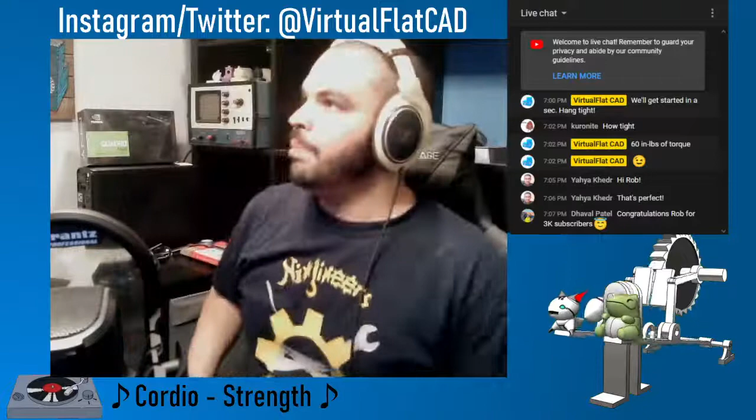Let me make the light not so intense. I just gotta adjust a couple things here. But yeah, still not sure what I'm gonna model for today.

I was thinking of Yaya's suggestion from last stream, doing like a gear cube. I think that could be pretty cool, or another one of the 507 Mechanical Movements. It'll bring me ever closer to completing that series. I want to complete it.

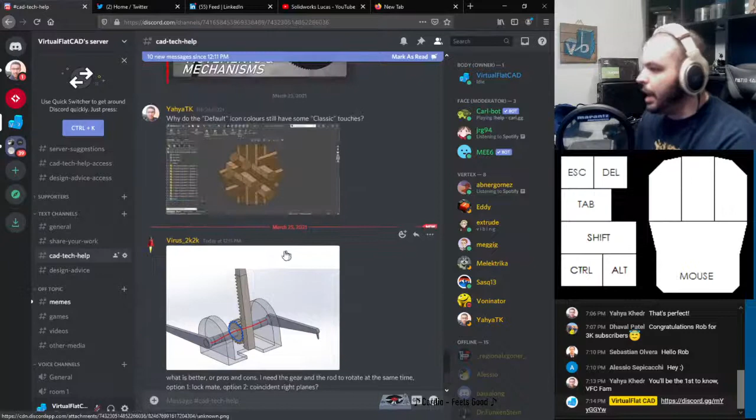So Virus is saying, what is better, pros and cons? I need the gear and rod to rotate at the same time. Option 1, lock mate. Option 2, coincident right planes. Let me take a look here. I see he wants this spur gear to rotate, basically fixedly linked to the rod that goes through them.

He asked a great question: should I use lockmate or coincident right planes? So Yaya's saying, I guess there is no difference. Well, that's almost true, and I'll elaborate, but I'll always go for the coincident mate. That's the same choice that I would make. Although I do have another option that I think is just as acceptable.

Why? For the same reason I never use the fixed sketch relationship. Yeah, it's true that a lot of lazy designers tend to just lean on fix, like, oh, it's just where I want it, let's just fix it in place and leave it like that. But I wouldn't go as far to say never, ever use it. It's there for a reason, but you got the right idea.

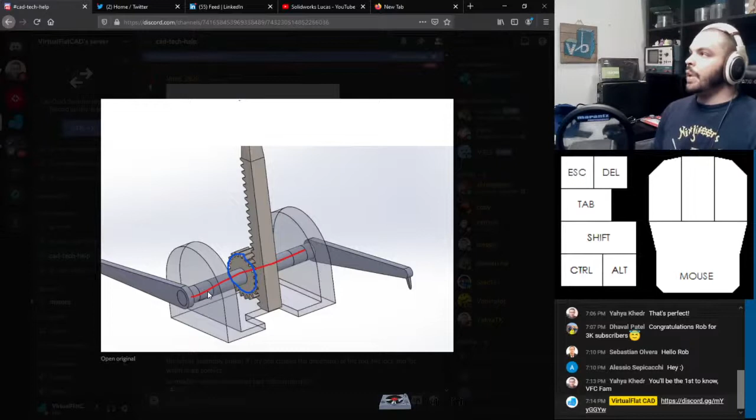So my opinion, coincident mate is better. Why is that? Lockmate just says one component is fixedly linked to the other with no other semblance of moving it together. So as an example, if for some reason it was modeled poorly or strangely - well, never with Virus's work, I know he's very good with his modeling - but let's just say this was some random model you found on GrabCAD by Joe Schmo, who knows.

So why I wouldn't use lockmate is that if maybe, for example, the gear is not exactly on the center of that shaft, if you put lockmate, it will lock those two together. That's true, but it will produce a lopsided rotation.

Lock doesn't have the intelligence to say, oh, this is supposed to rotate concentrically just to fix them together. But presumably there's already a lockmate, there's already a concentric mate there beforehand. So just having the coincident, if it's not in place, it'll move it in place, and you'll get that rotation.

Another thing you can do with this is if these are two separate components, you can actually click both of them and put them in a sub-assembly. You right-click both components, and there's a line item for form sub-assembly. Let me see if I can demonstrate here.

If I get just like an old... I think I did that here, so let me delete... oh, I killed the sub-assembly, so don't mind me. So yeah, here's actually kind of the same thing where I have this and this that need to rotate together.

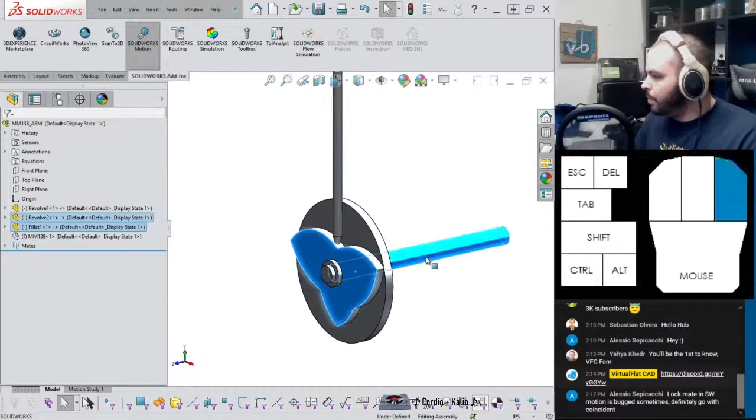So could you use the lockmate? Sure. So let's see. Well, there it is. But I want to actually make some identifying feature because I can barely tell that it's rotating.

So let me just do something. And I think that's gonna goof it up. Let's see how it does. I might have to fix that sketch. Yeah, I knew it, now we gotta fix that. We don't want... whoops, I hit F1 by accident.

My bad. Yeah, we want the midpoint to be snapped because I need to overbuild it. There we go. Identifying feature. So we have this and then this that need to rotate together.

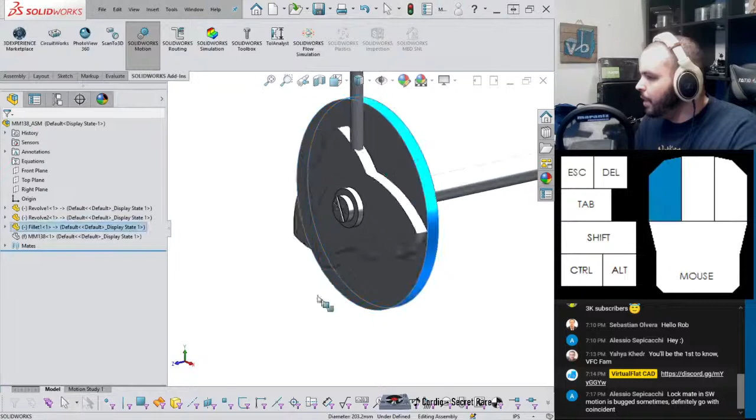So let's check out lockmate. Lock two components together. It certainly produces it, but you notice that beforehand. Whoops, there we go, until the lock is gone. If it was something like this and you didn't notice, and then you bring those two together.

Wonder why I'm not getting lockmate now. Perhaps I'll just find it here. Lock. So if you do lock just like that, you get something like this. The lock doesn't care, it just says put them, make them move as one.

So I like using the actual analytical mates. It can be a little bit kludgy sometimes. Alessio chiming in: lockmate in SOLIDWORKS is bugged sometimes, definitely go with coincident. Yeah, I totally agree with that.

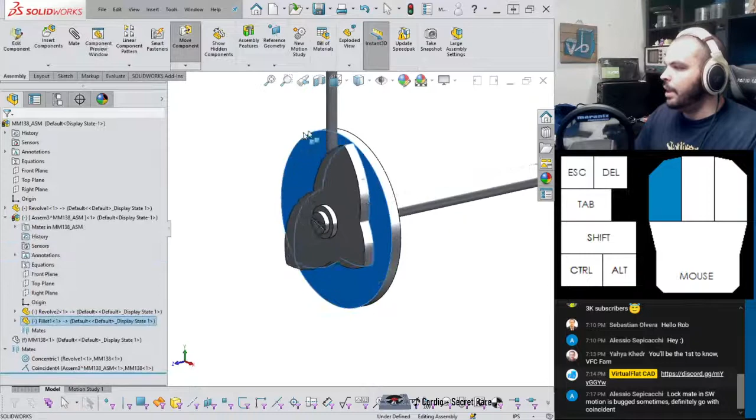But a third option is to do what I did here, although I think I should have just made it normally. You select the two components in question, right click, and say form new subassembly. What that does is make them move together. You can open up the subassembly on its own and then put more mates here if it's not quite right. But depending on what you want, you might not want a subassembly.

I hope that clears things up, and in this specific case, you can try concentric plus lock rotation instead of lock. That's another thing you can do.

Although you have to be careful. Let me see, so I can dissolve the subassembly to put them back. But yeah, for example, I can say make concentric like that. And with this concentric, I'm wondering what it'll do here. You can actually right click and say lock rotation. Oh, so I guess that works.

As long as... so what wouldn't have worked, so, you know, I model this in the way that I usually do, where I have a circle in the multi-body part that this came from. So this is yesterday's CAD model today, by the way. So let me remove this concentric. Let's do an experiment. So if I grab, yeah, so it looks like I have that arc 2 at sketch 9, so that's correct.

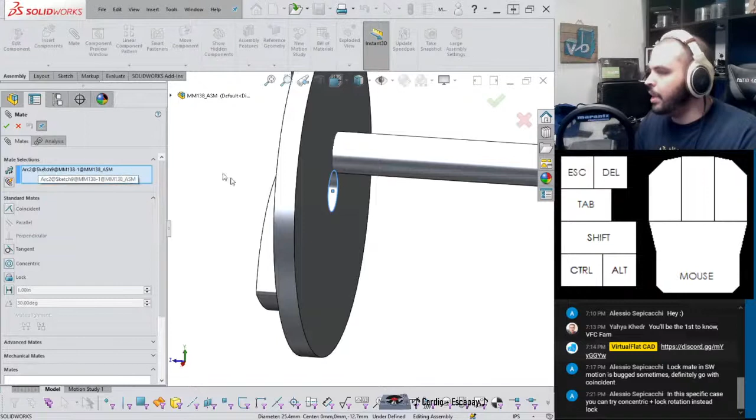With this, you can say concentric, and then within that concentric, say lock rotation. So now this can spin, but this is stuck in place, because the thing you're going coincident to is basically, well look, it's got a little F in parentheses. It's a fixed part, not meant to rotate.

So you can use lock rotation too, just be careful with what you're mating with. What you select matters. You want, for it to work, you need to select a cylindrical surface of the part that's moving. I'm sure you guys would have done that anyway, because you guys are pretty slick. But it's important to point this stuff out sometimes. It can be tricky, it can be very tricky.

All right, so what else we got? Let's get back into here.

Ooh, do I have it? Yeah, I actually got another window. But yeah, great question, Virus. He asked another question.

I've answered this one in the past, but I'll do it again because it's such a relevant question, especially if you want to produce animations like I do. So what is the best codec to export video? Awesome question, so we'll go over it.

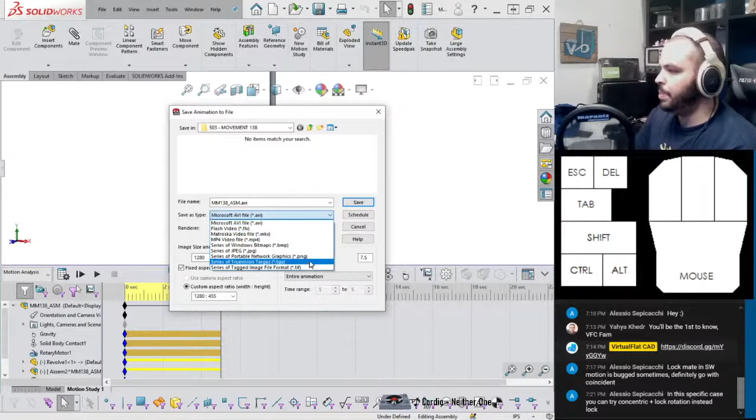So we have a handful of options, and this list got expanded in SOLIDWORKS 2019. If you're using the latest version, 2021, or like me, 2020, or even 2019 when the new options appeared, your best option by and large is MP4. From file size to just clarity of the video, it doesn't have artifacts. MP4 is just the best for that. But before 2019, MP4 wasn't available.

I believe you had, I think just, I gotta check what the new options are, or what the old options were, because I know AVI was one of them. I don't think Flash Video or Matroska were there, MP4 wasn't there, but I think series of images was there, so you can have bitmaps, JPEGs, and PNGs if you want. And correct me if I'm wrong.

So basically, you want some form of AVI. So if you've watched my streams in the past, I just hit MP4, and you just save it out, and that's it. It doesn't give you any more options.

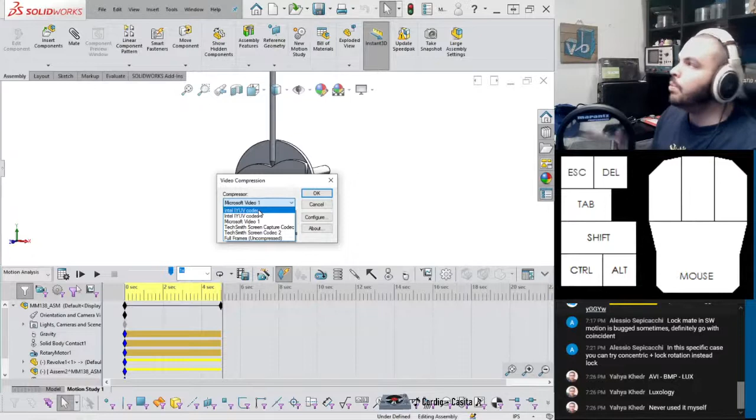I haven't really found a codec that doesn't make the video look like garbage. So let me see, if I do Microsoft Video and let's just hit OK. Let's see what happens. We got the ding, ding means it's done. And open up with media player.

Yeah, but here, let me, what I probably should do, sorry about that, should have made that square video. Let me see, can I zoom into this? The thing is, I don't want to put it into VLC because that's what's playing the music right now. Let me try it one more time, but instead I'll make it square format.

So square, AVI, we want to replace, and we're going to test with a Microsoft Video codec. Didn't give me that message before. Give me that corrupt AVI.

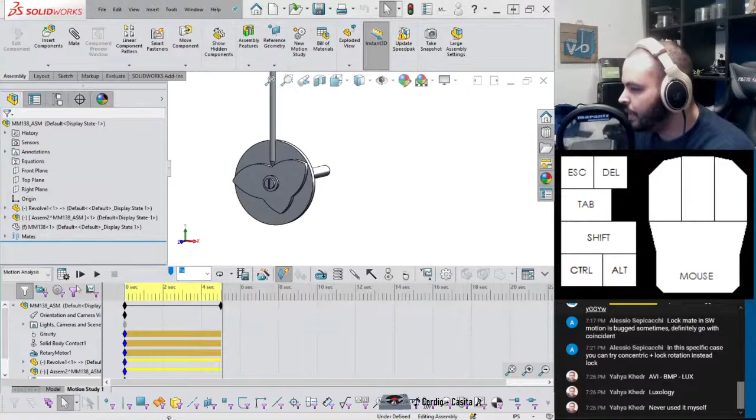Yeah, that's a bit better, but I gotta drag it onto the main screen. But yeah, now you can see a little bit better. There are these nasty purple artifacts on it, and it just looks terrible, to be frank.

So my recommendation is don't use a codec at all. Do this, AVI. We want to replace and just go full frames uncompressed. For quality, that's what I recommend.

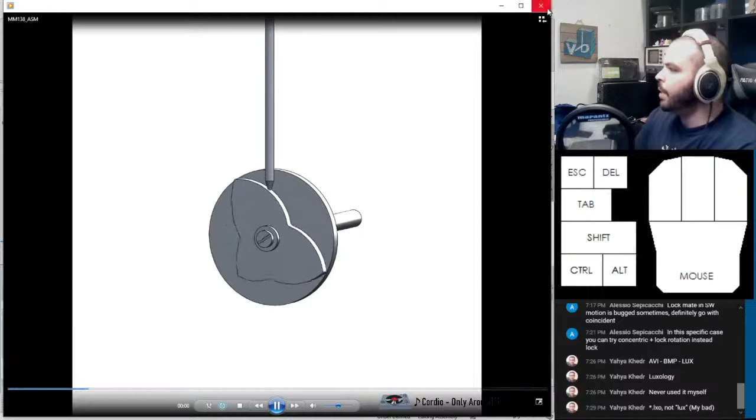So let's take a look at the difference here. See, none of those artifacts remain. But Virus already knew this.

Oh, okay, that sounds better. Yeah, that's why I was a bit confused. But it's like I haven't looked at those old versions of SOLIDWORKS. But as you can see, better results.

As Virus was saying already, he already pointed this out. I only have AVI, my file size ends up being in the gigabytes for 5 seconds. I don't know if that is the case, but this is already at 200 megabytes. Enormous file. So that's the downside to AVI uncompressed.

Yeah, I don't think there's really a way around it. There are online converters that you can take your AVI file and get an MP4 out of it, which would hopefully be smaller. The only other piece of advice I can offer, if you have editing software like Adobe Premiere Pro, you can actually import a series of images as frames. So then you would do it as a series of portable network graphics instead of AVI. Yeah, you hit the nail on the head.

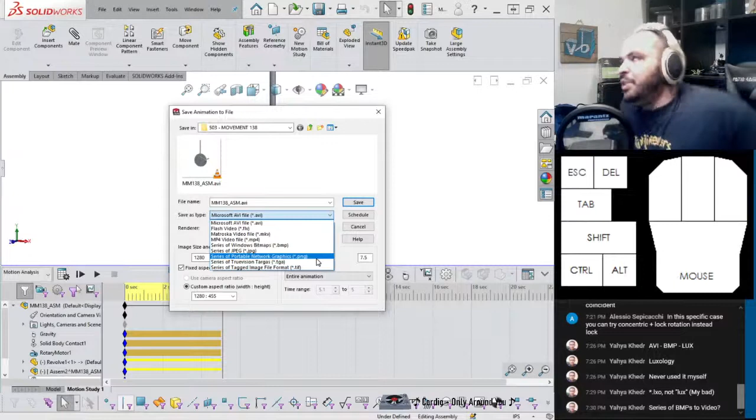I'm pretty sure you said it a little before I did, but I just saw your message. That's the next thing I'd recommend: series of images. If you have Adobe Premiere, there's actually an option to select a folder and it'll turn it into a video for you, but you need that editing software.

Not a lot of options here, but I'd say AVI uncompressed. Give it to an online converter, or download software to do it for you, and just delete the original file to save on space, or put together a series of images.

Yeah, YouTube chat lag again. No, it's not that, I don't think the lag's that bad. But that's my little bit of recommendations for that. Hopefully that helped.

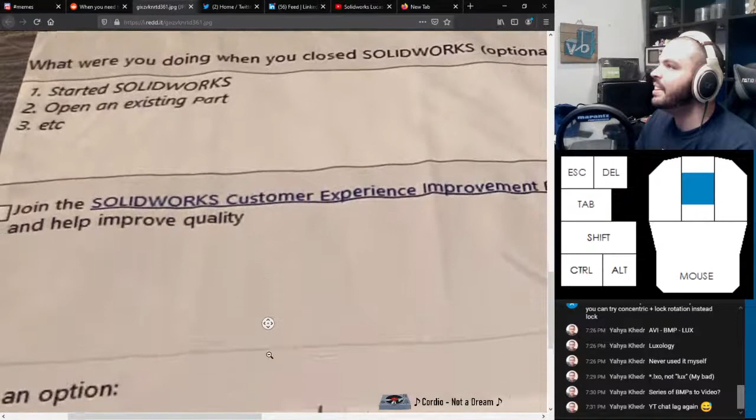You got a meme, from the SolidWorks subreddit. Let's see. Oh my god, where do I buy this? Bro, I need to buy this. That's literally amazing. I'm gonna see if I can have one of those made. That's too good. Yeah, how do I get one? Salvatore's being savage, says just try to type it in the open file search dialog box. You'll get one. That is too funny, dude.

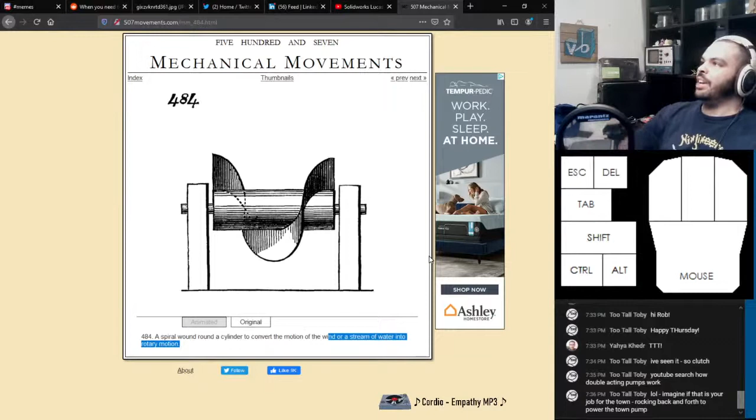Rocking, yeah. Too Tall Toby saying, imagine if that's your job for the town, rocking back and forth to power the town pump. I just imagine it, you're sitting in your home, you turn the tap, nothing comes out. It's like, that Jerry, is he sleeping again? You gotta get back on that pump, Jerry. Or by golly. Oh my god, that is too funny to imagine.

Common windmill, this is kind of cool. Screw propeller, the blades are sections of a screw thread, and the revolution in the water has the same effect of working a screw in a nut.

I like this where this is going, because there was a couple of people talking about the lack of surfacing, and this would be a good challenge to do for surfacing. Definitely haven't done that before.

This is cool, ordinary steering apparatus. Well, it's ordinary back then, this is like for a pirate ship. I've done 493 before.

What is this? Ferguson's mechanical paradox, designed to show a curious property of the epicyclic train. All right, this is too much for my brain after a long day of work, so we're gonna ignore that. I really like the propeller.

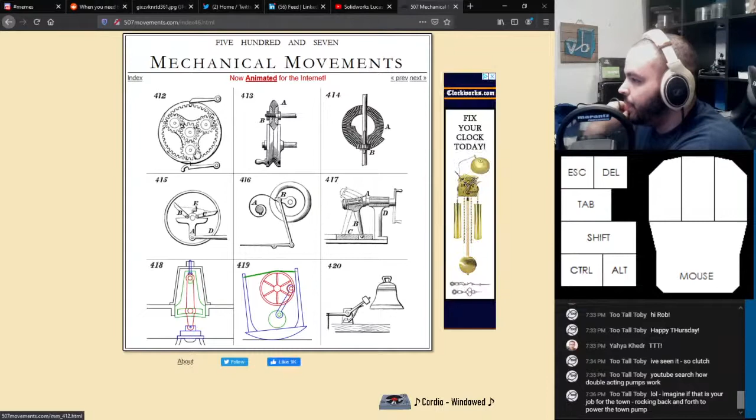What is this? This is kind of cool - will work in the base of the capstan. Look at these hands. It's so weird because we're looking orthographically at the device, but then there's these hands. I'm really liking that propeller.

Yeah, here's the one with the horse in it. I'm not even sure how I'm gonna do this one because it's basically a hamster wheel - a large hamster wheel with a horse in it, and he slapped a number on it, called it a mechanism. That's interesting. What is this? Bowery's joiner's clamp, plan and transverse section.

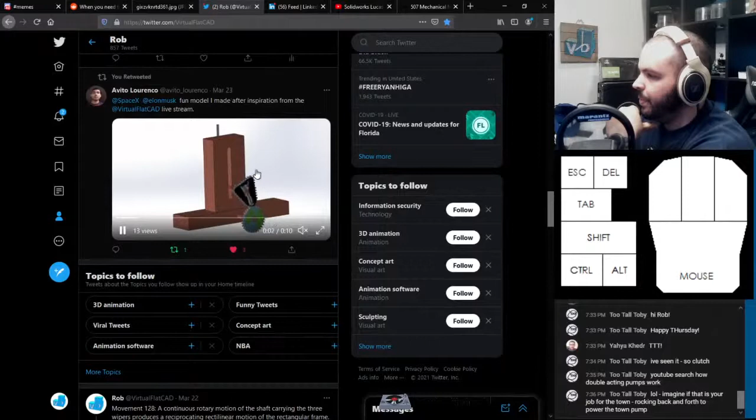That one's interesting. I think I'm gonna do that propeller just to break from the monotony. Oh, that's Avito's work, retweeted that. Yeah, everything I've done has been super prismatic. Well, maybe not that, but I've done a lot of prismatic stuff, so I think that'd be a nice change of pace.

Let's go look for it first. I lost it. I'll know it once I see the screw. So, 488. Yeah, let's do this one. So save. Put that in the 504.

Is Pickle Rick considered prismatic? Absolutely not. It's considered funny. Funniest thing I've ever seen.

Oh, I goofed up. 488. Throw this in here. Let's dismiss all of these, we don't need it anymore. Open - oops, no, we want to start a new part. Oops, we want to start a new part. My misclicks. I tell you, man.

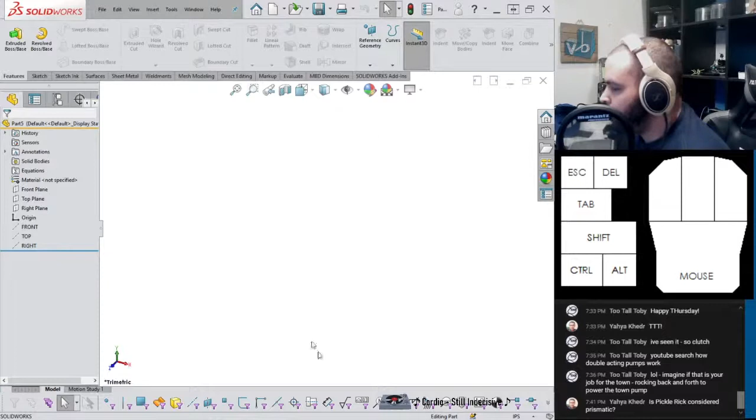Yeah, I think I'm just gonna paste a picture because I don't really have to trace anything, honestly - I'm just gonna do it by looking at it. So let's just copy the image and paste it as an ActiveX object. Forgot there's no paste in there. Paste. So where's our origin? So we can do the shaft last.

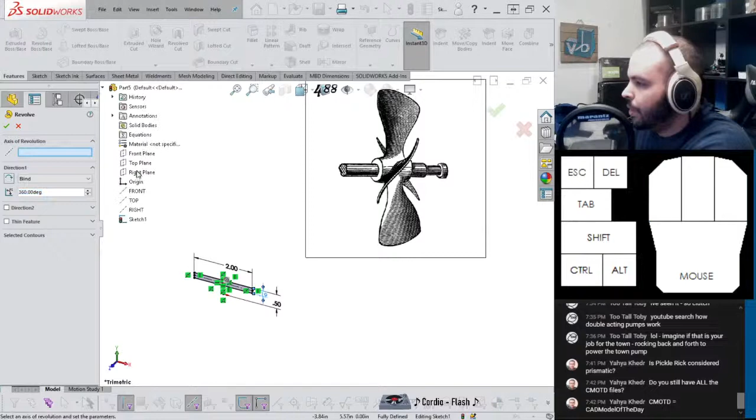I like how I'm gonna be doing this tube, kind of weird, but whatever. And let's get a revolve. Oop, I want, yeah, this. Okay, so how do I want to do this?

So definitely when you're working on something like this, you need to mentally break it down into its parts. So let me get the markup tool - SketchUp is a different program, maybe I'll use it sometime, but if you haven't tried markup, I think it appeared in SOLIDWORKS 2019 or 2020. It's a recent feature, but you can draw stuff. Stuff like, you see how this is kind of curvy? So I expect that to be a fillet.

So when I try and sketch this shape, I want to try and mentally remove where all the fillets would be, if that makes any sense. Because the more I try and do at any one time, the harder the feature becomes to create.

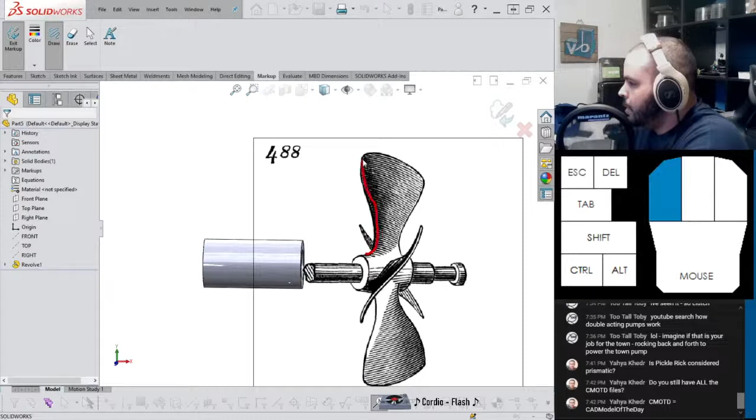So instead of drawing this thing exactly as shown, what I might try and do is draw, maybe starting from the center line of that axis, maybe going up something like this, and then coming up to a sharp point.

Maybe I want to go for something like that instead, where, let me change my color, this green line and this other green line are something that I can easily draw on a 2D plane, so I can control it very easily.

So for challenges like this, it's all about breaking it down into its bits and pieces. Not trying to do too much with one feature, because it starts becoming very difficult. And I might even make it even simpler than that, because there's a way to break this down even further.

Oh, I meant to try and erase that. So I'll show you. So instead of drawing this line and trying to get it to follow a curve...

Do I have green still? I do. I might draw these two curves, kind of the same length, like that, and then turn that into a surface, and then draw something like this, and then trim that surface down. So it's all about just breaking it down into those little bitty pieces.

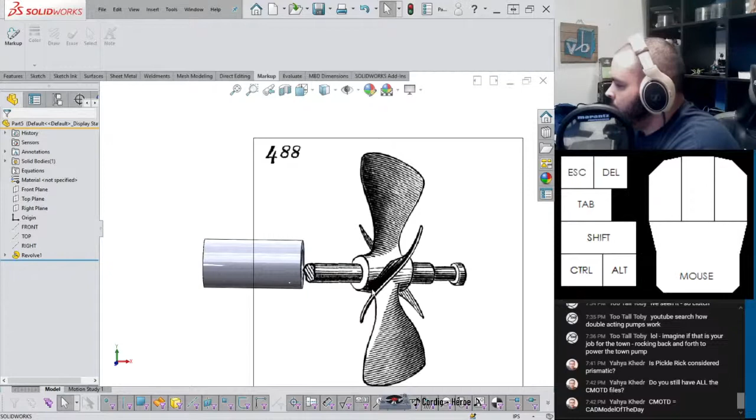So I think the first thing is I'm going to draw a sketch on the top plane. It's hard to kind of imagine the contours, but I imagine this. So you can see with the shading here, the darker shading implies a low spot. Light is coming from the left hand side, and the artist drew it shading here because this thing is curving up a little bit.

So there's going to be more extreme up here, but then it kind of dies down here. So it might even just be like a straight line. Let's try a straight line first. Simpler the better, right? So maybe we'll start with a midpoint line.

And we'll give it 1 5/8. So that's one. Let's get another plane like that, and maybe make that 4 inches long. It might end up being a little bit shorter in the end, but I think that'll be okay.

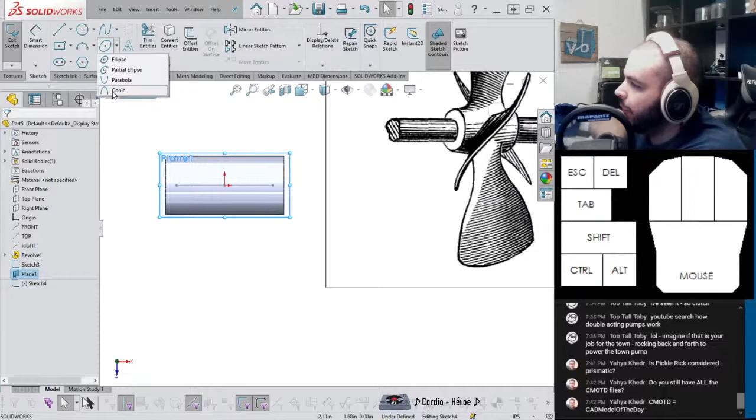And maybe what I want to do here, maybe let's try a funny sketch entity. No one ever uses a conic, right? So something like that.

And then we can start putting this into place, saying that those should be in the same place. I want to define the rho value. Maybe I want to make that a little further.

Oops, I meant to type. Oh, I totally dyslexic that. Is that even a word? So what should this be now?

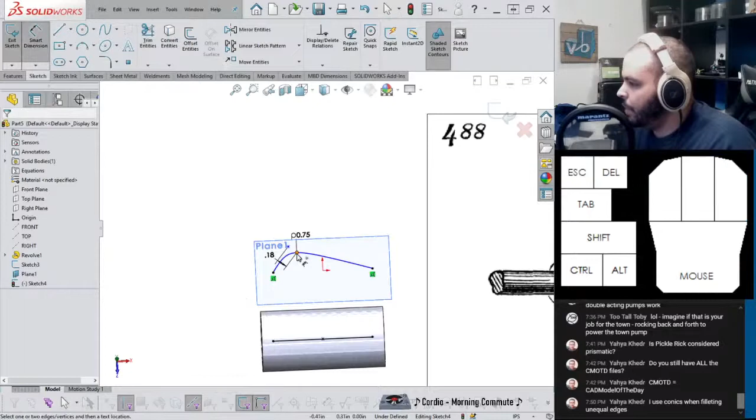Okay, so now use conics when filleting unequal edges. Yeah, it's an awesome way to use that. Although I think I assume you're talking about the conic, unequal distance. Yeah, that's a pretty common use for them.

But I assume you're talking about like the options that are in fillet. I don't really see a lot of examples where a conic is used as a sketch entity. And I could have just done that with a spline, but just to be cheeky and to try something new.

So now at this point, I'm gonna go grab a surface. You can see from the propeller, from the engraving here, that it's a thin sheet of constantly thick material, and that's like the perfect opportunity to use a surface, pretty much.

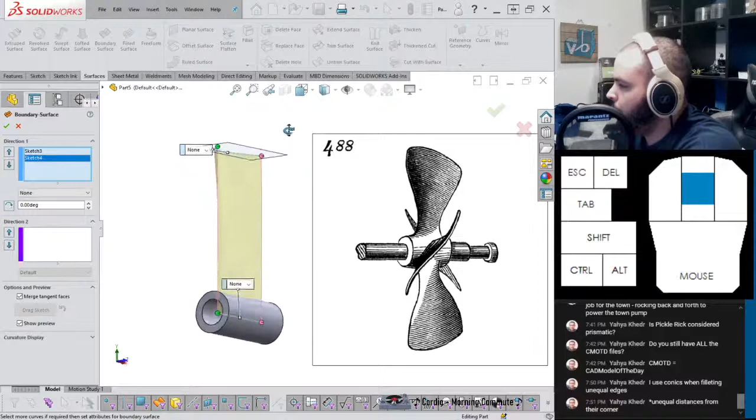So when you have a surface and want to get something of constant thickness, you create the surface using the trim tools and all the special functions, and then you thicken it at the very end. So let's see if I get a boundary surface from here to here, a nice four-sided surface.

You get something like this, and I might turn real view off, but you can kind of see where I'm going with that. And then what I can do, I'll make like the tapering here. Let me hide this away. I did that just by hitting tab.

Taper this away. I'll do that with, I like using a style spline. Actually, let me hide the original plane away. Something like this. So whenever you have a style spline and you start with one of the control vertices like in line with this, that means you just have it tapered down to be basically tangent with that, which is kind of what that looks here.

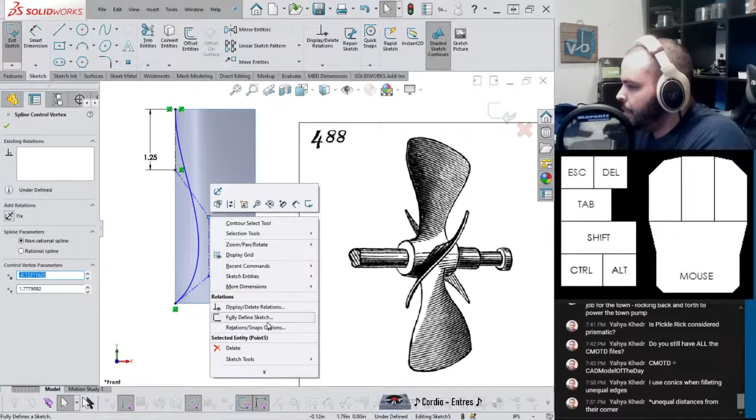Now I can kind of use this to fully define our shape. I might even remove—let's see what happens if I delete that. No, I kind of liked it how it was before.

1.25, something like that. So we kind of have it like this. And I might even say, put a center line like that. And I can say how wide this needs to be, or what's the width of this thing here. So I'll put that center line there. Maybe even make it infinite length so we can easily distinguish it, and say that this is tangent, and that should fully define it. So now I should be able to control this dimension, and this spline will move along.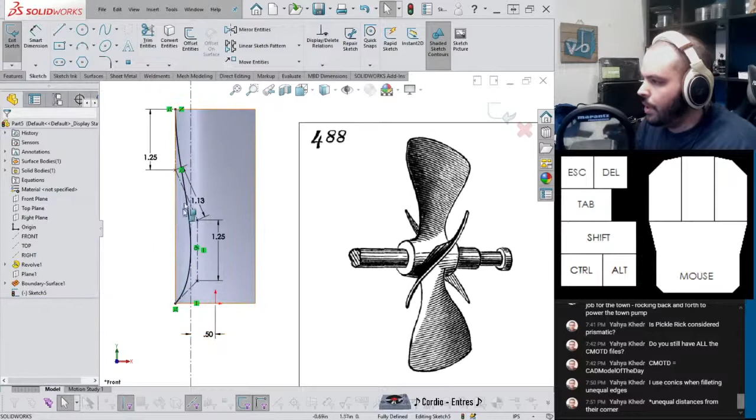And it's tempting to do the other side too, but I think this sketch has enough complication as it is. Don't be afraid to use more sketches if you need to. Simpler sketches are easier to diagnose when things go wrong. And you have infinitely many sketches you can take from. There's no shortage of them.

With a trim, get our standard trim, because if you have a sketch to trim with, you use standard. And there's kind of our first shape. So again, I'm just mentally removing the fillets. So there's that markup. At the end, I want to be left with a shape that looks like that, because I can take care of this with a fillet. I want to keep my surfaces four-sided if I can help it.

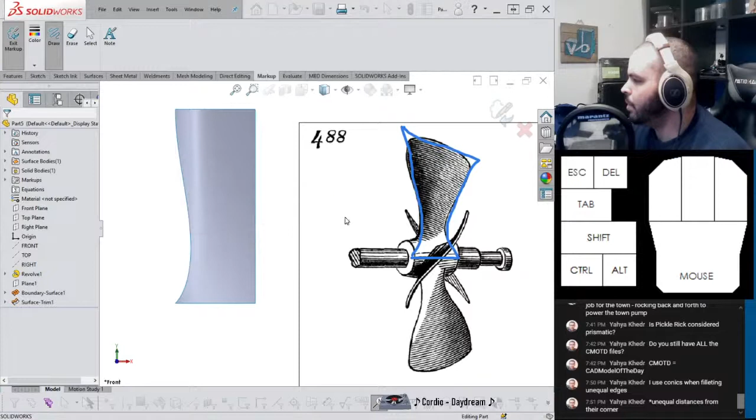So yeah, we can get rid of that, sure. Do another front plane. I might do that, you know, how it kind of comes down from the top, like that. And how far does that come down? Maybe that much?

Trim. Let's keep. And then now, just kind of do the same thing with a style spline. I think that'll be pretty cool. Something like this.

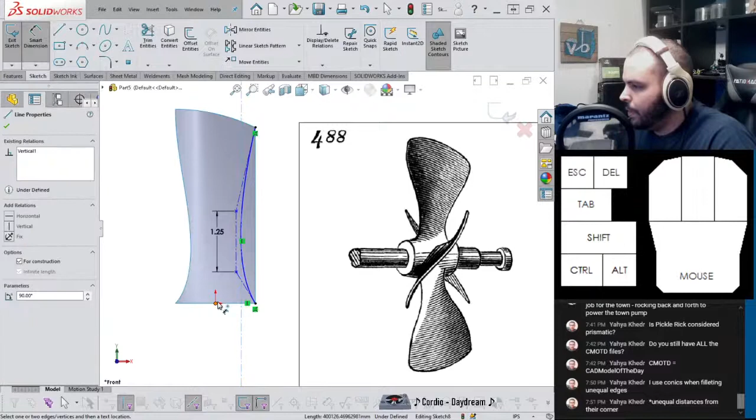1.25, trying to make it similar to the other one, and I'll even do the same thing where I get a center line. Let's see, that's infinite length. And give that a distance for this to stick to. So basically, where do you want this thing to rest? And, you know, maybe I'll try and make it somewhat equal with the other side, like that. So I just put a horizontal relationship between the two control polygons.

And what now? Trim. And that's kind of our blade. Kind of how it looks. Yeah, you need some work still, but you know, we're getting there.

So what I might do next is thicken. Just do thicken on both sides so we get this kind of equal. That might be too thick, honestly. Just kidding, there's no such thing as too thick. But for this exercise, I'll do something like that, right? This is overbuilt here, but that's something we can take care of pretty soon.

Because now I'll do a couple of fillets. And there's probably fillets that break these edges, but remember, you want to work from the largest fillets down to the smaller fillets. That's how you get the best chance for all the fillets you want to apply to actually complete.

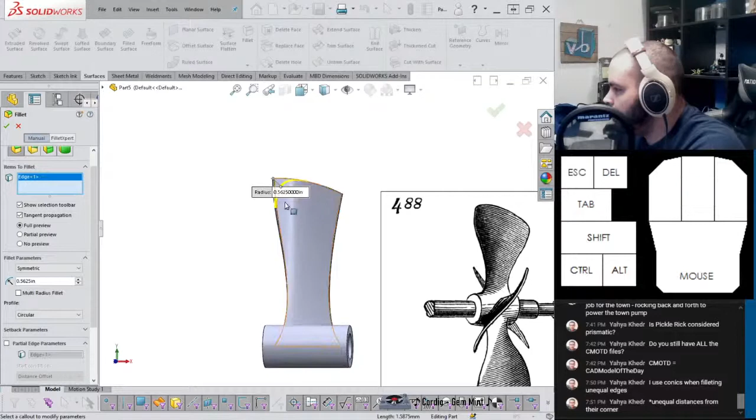And what I might say is, you know, that's looking all right. Maybe it's looking a little sharper. So maybe I'll take a page out of Yahya's book and say, let's go for a conic rho value. So the way this is might be a little too big. Let's see. There we go.

So with conic fillets, the way I like to think about it is you get a radius, which is kind of like this overall arc. But if you set it to 0.5, that's basically circular. And the closer you get to 0, the closer to a chamfer you get. But the closer to 1, and there's a limit to that in this example, the closer to 1 you get, the closer to the sharp corner. So it's like, on a scale of chamfer to sharp corner, where do you want your fillet?

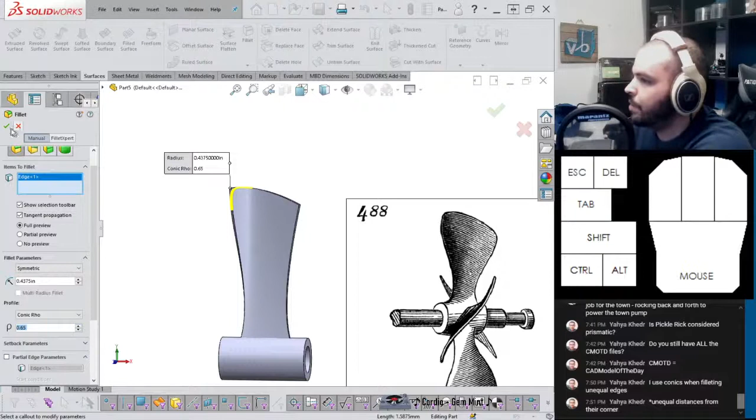So it's pretty cool. So maybe I want to actually turn that down a bit. So that is looking kind of like a sharp corner. So maybe I'll leave it at 0.6, maybe 0.65. That's looking pretty swell. Maybe I'm able to fillet this one with a similar look, and that looks pretty good.

I definitely like that. Alright, so now I need to pattern this eventually, doesn't have to be right now. Part of me wants to throw a curve in here. You see how this is straight? Doesn't look quite right. What I might do is roll this back to where I had this.

Yeah, I don't have this set up totally efficiently. Let me get flat tree view so I can reorganize this. So flat tree view, you hit Control T, and that puts all your features in like a literal order.

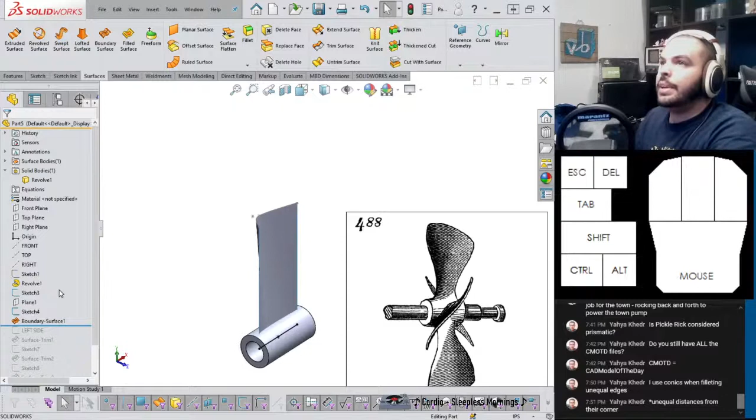Yeah, I'm gonna need a new plane. Not the biggest of deals, but I try to avoid having to create a bunch of extra planes if I don't need them. I can do something like that. Let's roll back, because I do need this new sketch I'm about to do created before that boundary.

And let's just try an arc. Let's see what that looks like. And then with this, I can just put a value. And that's the end.

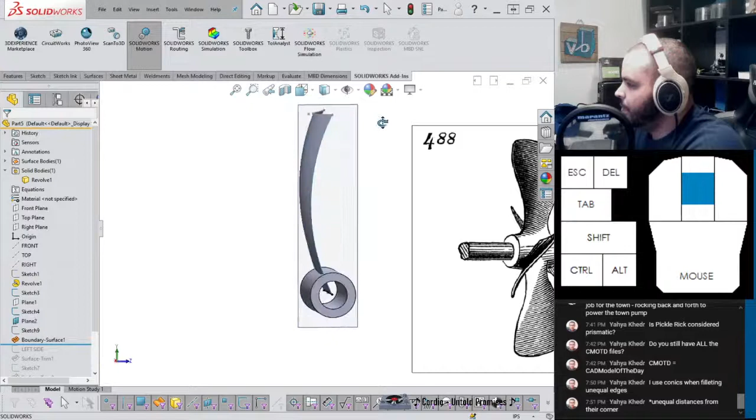So boundary surface, we need to edit. So for direction 2, let's put this. And that should put a little bit of character to our blade. Looks pretty cool, so let's see what happens now. So our trim fails. Let's see what's wrong, my dude.

That's interesting. If I clear, put this back. Okay, so I just had to reset it. I guess you're doing the same thing too. Sketch 7. Not really sure why this needs to be done, but whatever.

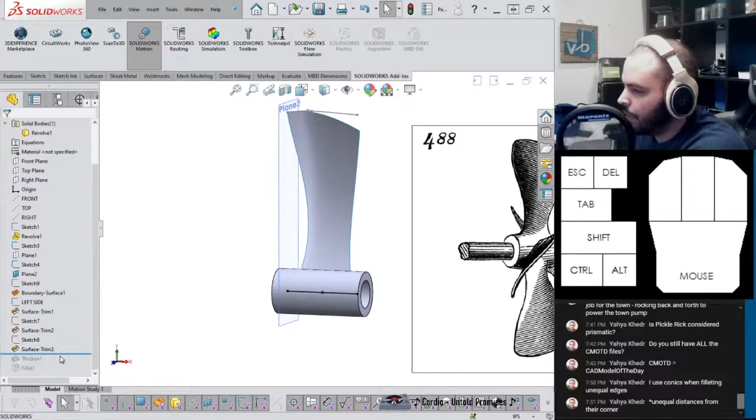I assume this has the same error. Well, the thing is, it's the same feature, so I would assume that the edges would be the same, albeit, you know, they're curvy now. Whatever, as long as we have a way forward. So that goes through and that goes through. That looks pretty cool.

Kind of want to adjust this. Put that over here and maybe put that like there. There we go. Everything just updates, and that's kind of how it looks like. Okay, now that looks like something.

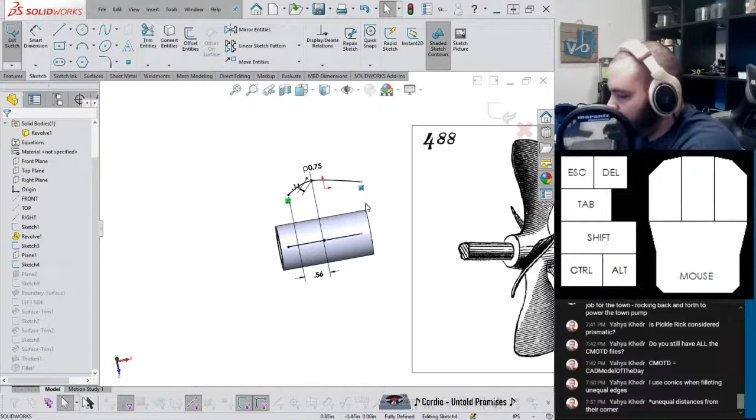Yeah, something I'm also considering as well. Man, it's just with these things, I can never just leave them alone, can I? What if instead of this, I do this? You know, give that a distance. Yeah, this is going to need a lot of adjustment. Sure, we're done with that before going on to this.

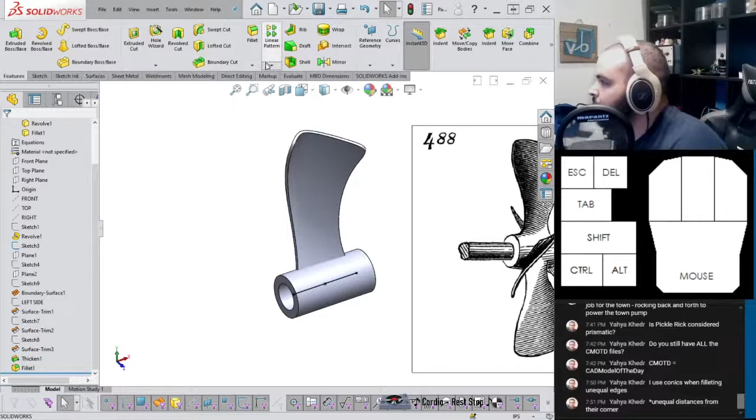That's pretty cool. So you can see when you build your sketches consistently, ideally you should be able to just do all these sort of testing stuff without blowing everything up, you know. But yeah, I think I'm just gonna leave this alone for the time being. Though no promises on that. You know how I am.

Part of me wants to merge this. Honestly, what I should do, let me go back to this revolve and just make this 90. Okay, so now that we're working basically in quarters, because I see there's 1, 2, 3, 4 blades here, I can merge this.

Yeah, well, I'm going to use a combine because I don't want to mess up the conical fillets. I'm going to use a combine, and to get rid of this extra stuff, let's grab a delete face command, and even just like pick that, and then say all surrounding, delete and patch. Like it was never even there, which is pretty cool. Let's give that a save.

I did all of that without saving, like the mad lad that I am. I already forget what number. I'm gonna call it propeller.

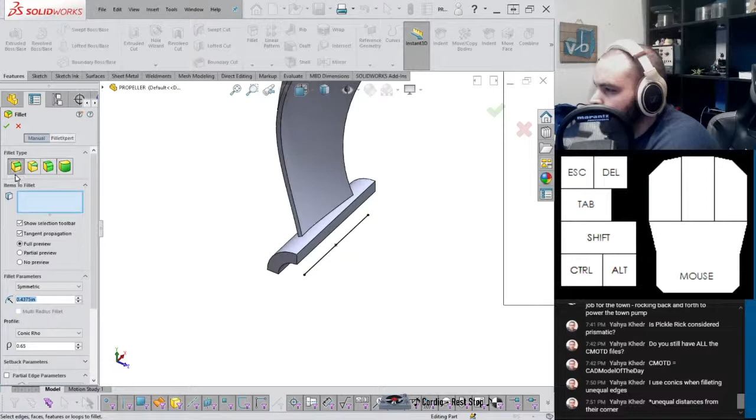Yeah, I'm gonna try and work on fillets and see what happens. So let me see if I can hit that right click and say select loop. It's gonna have to be a lot smaller. But I guess it appears to be too small, even with round corners.

Oh, but I'm still set to conic rho. Okay, that didn't do anything. That does not help me, so I may have to fillet these first. And actually, I can even specify a full round fillet. And it fails. Interesting.

So that goes in. Oh, I hit a face, didn't I? Okay, didn't like that.

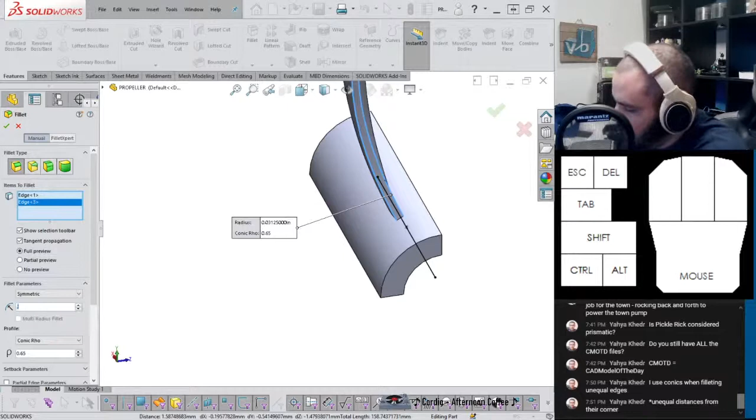Maybe we have to apply it one at a time. That'd be kind of stinky, but we can do that. Okay, so there's one. I'm just gonna do that same thing again. Actually, let's see view, display, phantom, so we can actually see what's going on.

And make sure it's set to circular. Oh, was the other one still set to conic rho? I need to check on that. That might have been the... Yeah, I was set to conic rho. What? I'm such a goon. I bet I can put both of these in here now. Yep. And then fillet 5 fails because it's lonely. And now, let's see what we can do about this edge.

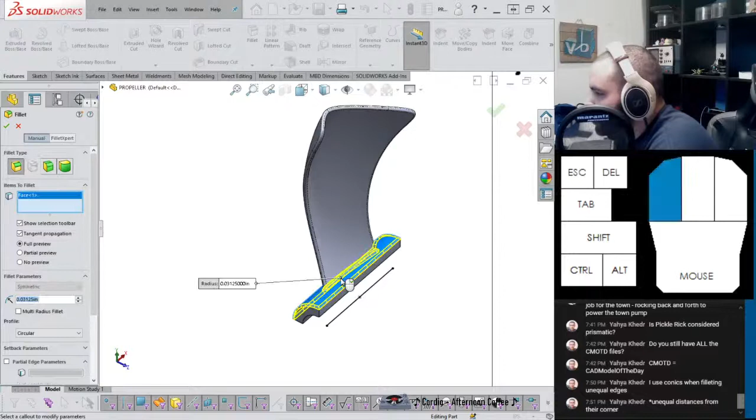I do want to make it kind of extra thick because of this. But I might have to say, instead of keep edge, keep surface, just to make it look more consistent.

In the fillet option, keep edge makes the surface look weird but always hugs the edge in these close quarter scenarios. If you put keep surface, the surface looks good, but if you look at the edge it's trying to trace, it kind of goes up like that.

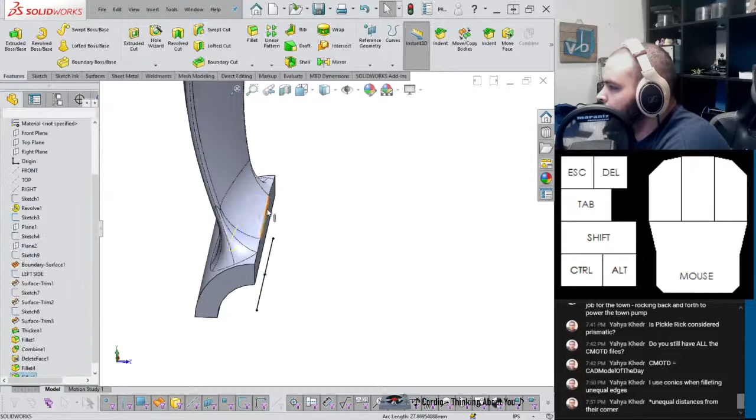I'm gonna pattern this anyway. Let's see if that will add. And that's enormous, I think that's pretty good. So what it does is it actually turns this edge into whatever it wants, but it keeps the surface looking basically as consistent as possible.

This is looking pretty good. It will leave like a flat spot, but I wonder if it can delete and patch that away. I think that's something that is yet to be seen.

So let's get bodies. That looks kind of cool. Definitely not a typical propeller design.

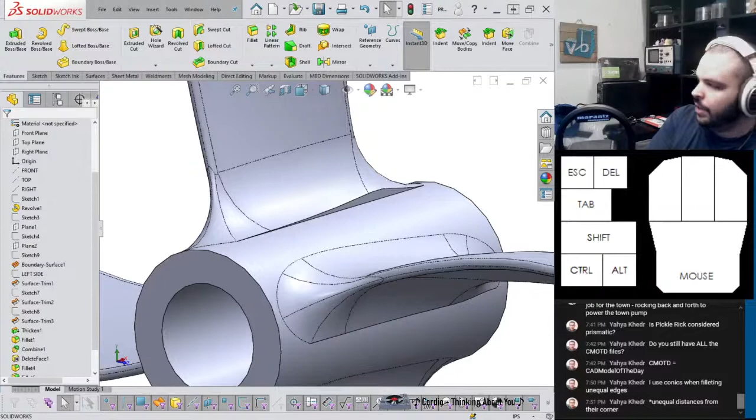Yeah, so like I thought, I was left with a flat spot. But let me see if I do delete face again. If I do that and say delete and patch, woohoo, that works. So let me go back into here and just pick the four of them.

The only thing is the one I made is a little bit taller than the one in the image. Let me see if I can adjust that, and I think that's by this plane. So I'll save just in case something bad happens.

Let's see how many errors I get when I do that. It's rebuilding, and none, I did not get any errors. That's... oh, I got a couple. You know, that'll happen sometimes.

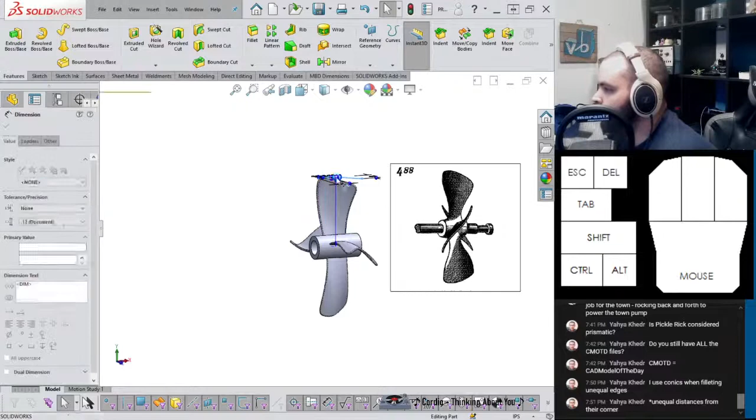Actually, I think I made it too short. Yeah, it looks very stubby now. Let's see. Now we'll change that. Yeah, I guess this was just so marginal.

Just make it a hair smaller. No one will really throw a fit. So if I... whoops.

Yeah, this is more curvy than the one that I have. So I should be able to adjust and actually make this value shorter. Okay, and fillet failed again, but we'll take a look at it once I adjust this.

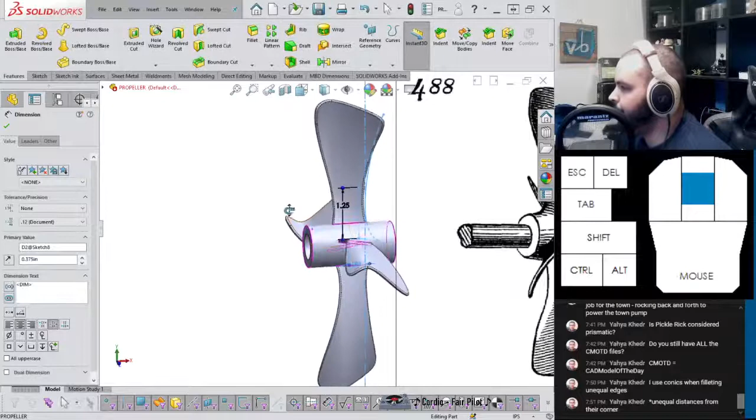Alright, so what is your problem, dude? Yeah, I'm cool with that.

So it's just like a little exercise on surfacing and some of the interesting fillet options.

So what's the inner diameter of this? If you could report it in inches, that'd be pretty cool. Whoops, just clicking all the wrong things, I tell you.

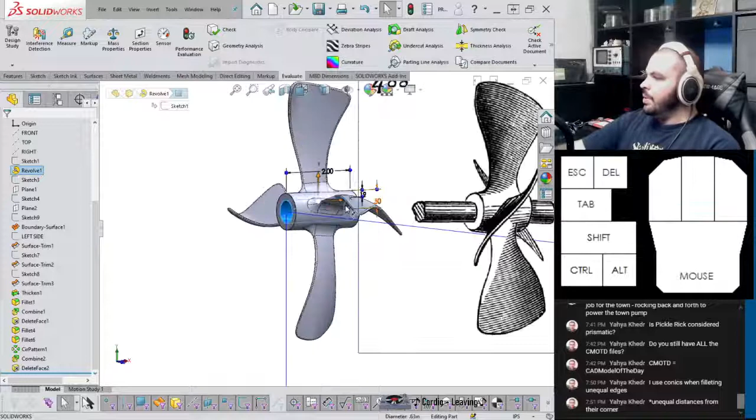So that is 5/8 of an inch. So I'll make this part just in another file. I won't go too nuts with it.

Yeah, let's see that, and like that. And then say select midpoint, put that here. 625 over 2, oops, and 625 over 2.

Oh, so that's correct, yeah. Okay, maybe you just have to make this a bit shorter then. Six. Come over here.

So how deep? Oh, let me get it over here. Oops.

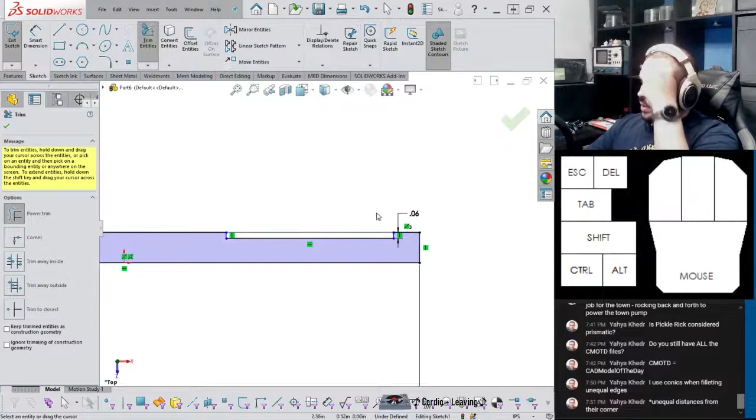Trim, we can grab this. Oh, I guess I can show you something cool with the trim tool.

Have you guys ever done this with a trim tool where you want to trim one thing, but then your mouse jerks by accident and you go too far and you blow up the other one too? And if you hit Control Z, you'll actually undo everything that you did, which is annoying. Because sometimes you could be on a long trim cutting a bunch of things, and then you just cut one extra thing too much, and it ruins the whole thing.

So here's a way to get around that. If you noticed, here, let me hit Control Z. Oops, I don't know why that went all the way back there.

Alright, so notice, when I get my trim tool, when I cross things, at the point where I cross the line, there's a red dot. Like, check this out. Do you see the red dot that I left behind? Well, that is more than just graphics.

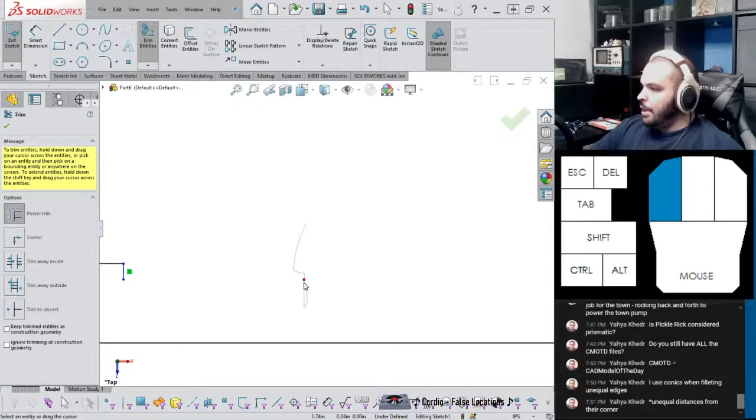So, for example, if I go too far and delete this entity, you see I left the red dot behind? Well, if you back up through the red dot, as you can see by the display right underneath me, if I go hold my mouse and go through the red dot, it actually undoes that one trim. Isn't that pretty cool? So, whoops, unwhoops, whoops, unwhoops. Could save you a lot of time.

And we'll just keep going.

Give that a revolve. Alright, give that a material, shaft.

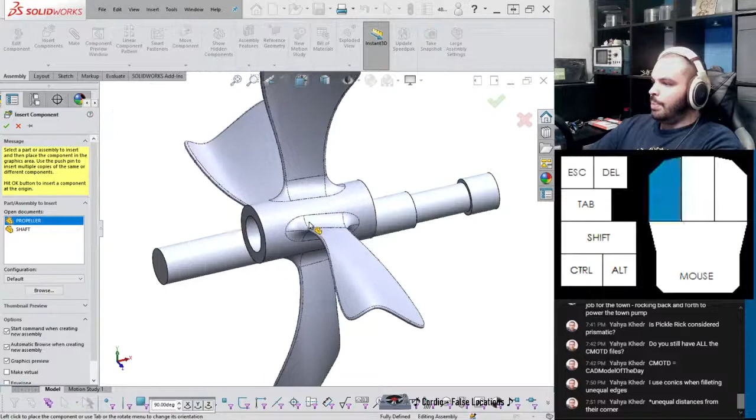Let's get this onto an assembly. I'm going to save the file first, 488 SM. First component is fixed, so I'll select that to be the shaft. Then I'll get the propeller, grab those and say make coincident. I think I'll just follow with a width mate, so selecting 4 faces will provide a width mate. And that should be that.

Unwhoops, coined by Rob Maldonado on March 26, 2020. Well, 2021. You gotta be very careful, you don't want to confuse the historians, because 20 years from now, everyone's going to be using unwhoops. It's going to be the newest thing, and you gotta know who started it. You know, it's all me.

Yeah, that is pretty funny though. But I think this needs a material too. Let's do 1060 alloy, but let's just make it look a little bit more interesting.

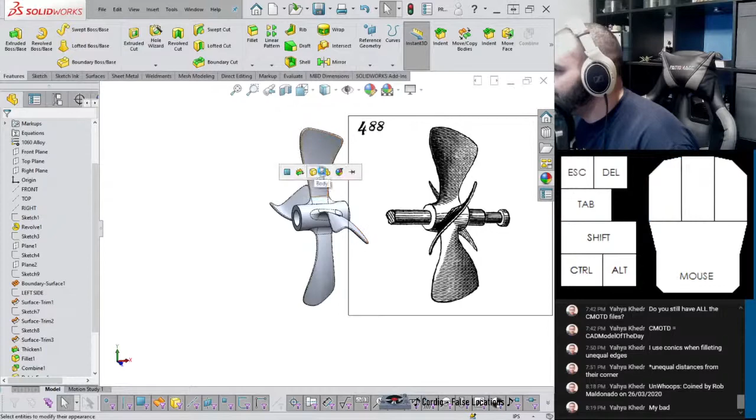Oh no, no worries, I'm just razzing you for no reason. Ooh, shiny. Get something like this, and then I can say view, display. Yeah, I think that's pretty cool.

Yeah, today's another simple one, but we got some surfacing lessons in there. Hopefully it was a good break from the month of just like, why isn't this thing contacting it right, and stuff like that.

But yeah, let's get this animated. And of course, like I said in my 3D Experience World 2021 presentation, if you can accomplish something just by using the basic animation mode, that's the way to go. Easier to calculate and faster. And if you can get your things to move correctly with the mates, then it's definitely it looks more accurate as well. Let's get that.

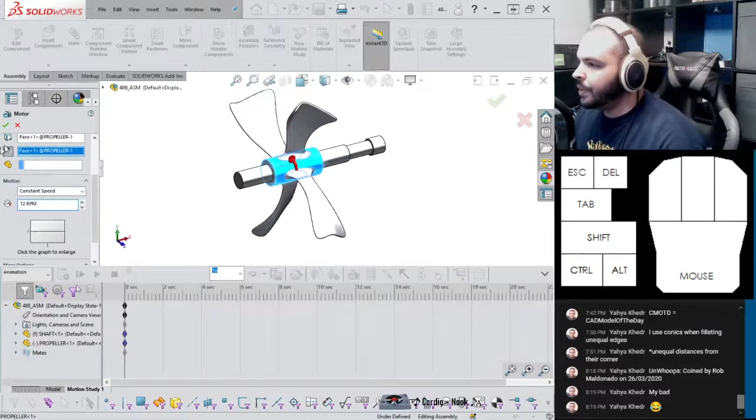And actually, since this thing has quarter symmetry, that it's symmetric about 4, I can actually get more bang for my buck. A lot of people like to see the animations in slow motion. But instead of making this like 20 seconds long, I can just go to the rotary motor, and instead of 12, I can put 3. That way, when this thing, at the end of 5 seconds, this blade will be exactly where this one was. And then when it loops, it looks like it keeps going. Sometimes you just need these little tricks to help with file size and other stuff. So now I can crank up the frames per second.

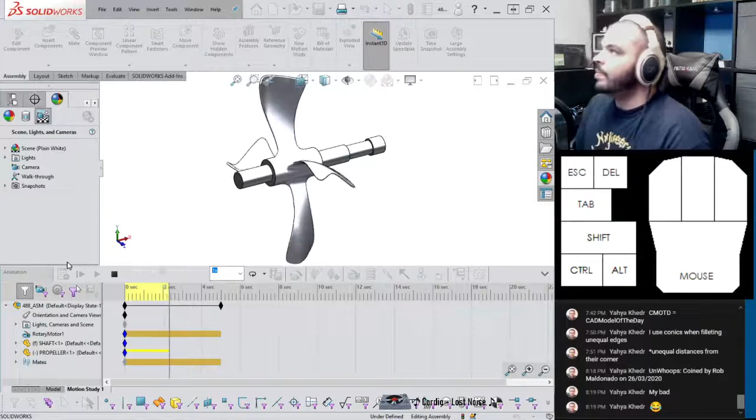Yep, gotta pump out those graphics smoother than real life. I really love how the light reflects off of the blade as it goes. That's really cool to me.

Let's try and save this one out. It's a little bit off to the side, but it's not the worst. If I just oversize the video, put it to 60, and then put this to MP4, and just save that out.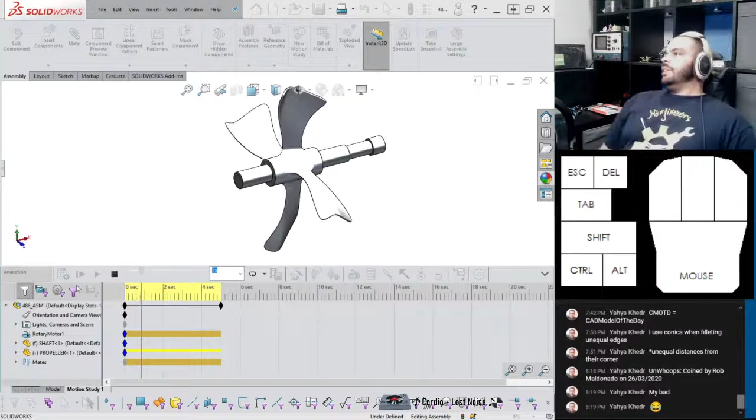Yeah, it's a brief one. But they all can't be, we can't go hard every single night, right?

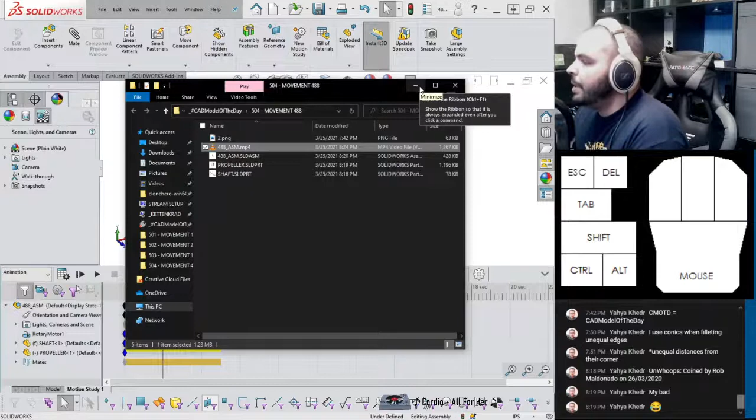Well, let's see. It's good, I don't like the lighting very much. It honestly looks a lot better in the preview.

Let me try something, I've never really used cartoon mode. But I think with cartoon mode, here, let me take that out, you can actually set the thickness of the edges. Cartoon edge thickness, how do we crank this up to 6? Okay, so it looks terrible here, but it thins out when I save. So let me save this out, this is for scientific purposes.

Just keep everything else the same and call this 2. Let that go and we'll see how it turns out. It does look very aesthetic though, I like that.

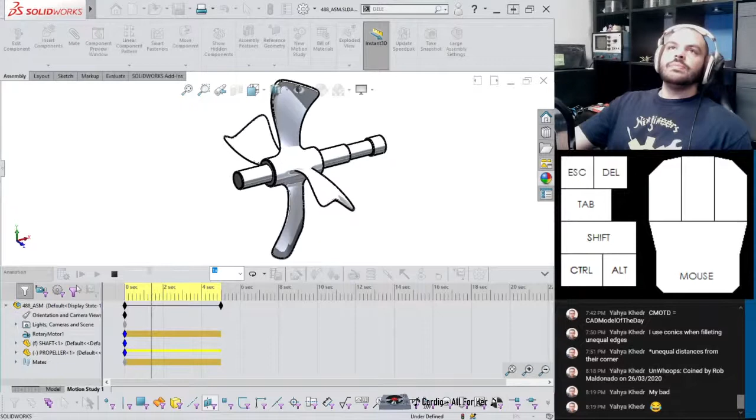Just gotta chill out and relax. I think that was from a different window. I'm probably just gonna browse the other 507 while we wait for this. So we're getting this one done.

What is this? Capstan. The cable or rope wound on the barrel of the capstan is hauled in by... that's interesting. So you're free to wind up the rope, but when you pull on the rope, it rotates this member. That's a cool one. I just need an easier way of modeling and animating rope, because it is pretty tough. Or at least the way that I have.

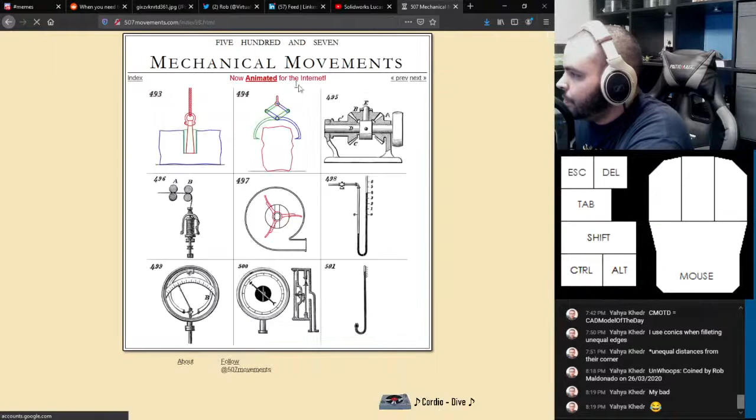All right, let's see what that turned out. I accidentally put in VLC. And it looks identical. I might fix that in post, honestly.

Yeah, it's just too bright. I might change the background and try it one more time. So scene, edit scene, and instead of that we'll make it like an off-white. There we go.

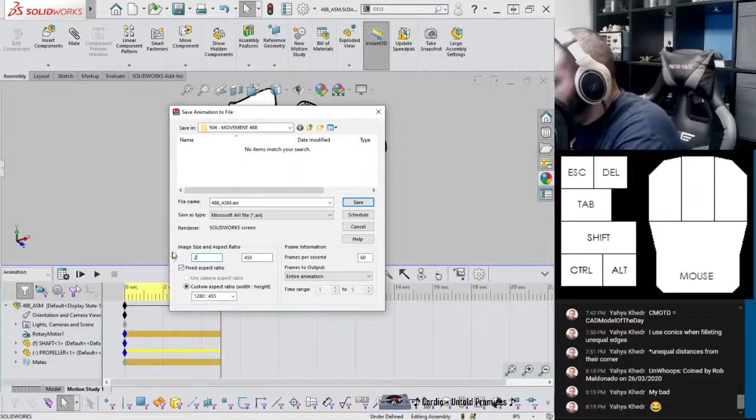I didn't even know you could generate a video that high res. We'll just go.

What else we got? Yeah, there's a couple of movements here that I have no idea how I'm gonna do.

What is this? An air pump of simple construction. Smaller tub inverted in a larger one. I see, the latter, so the larger, contains water up to the dotted line. There's a couple dotted lines. And the pipe from shaft or space to be exhausted passes through it to a few inches above water, terminating with a valve opening upwards.

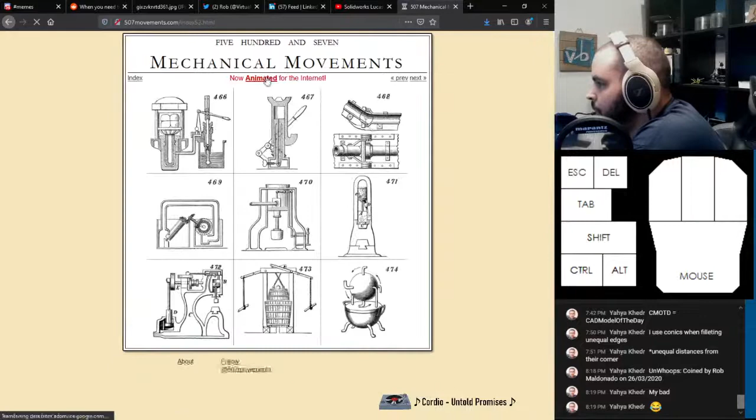When the upper tub descends, great part of air is expelled through the upper valve. That's interesting. Well, I'm gonna have a tough time showing that in SolidWorks. Maybe with like a flow study or something like that.

So I was thinking of another idea that I could do. I was thinking like September of Simulation or something like that. I think that'd be pretty cool - an entire month where I do basically nothing but simulations. I think would be pretty interesting.

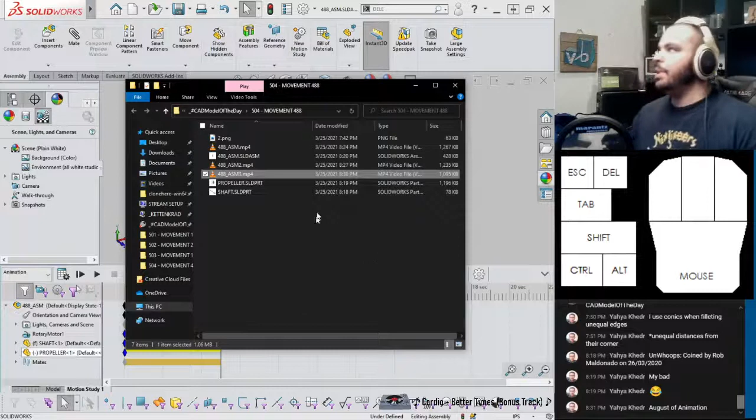All right, that's better. I think I'll probably use that. August of Animation - that's another idea. But I guess August of Animation would be for more goofy stuff, because mechanisms I've been very technical, which I love, but I love being goofy at the same time. So I would do something like... where's my Instagram?

Just scrolling down through the things I modeled. Okay, I'm looking for 144, I believe. Oops, dropped the thing I was playing with. Ooh, I blew past it.

August of Animation would feature stuff like this. Maybe even April of Animation. As much as I want to do that, I actually would like to take a little bit of a break from making an animation every single day. It doesn't look exhausting, but when you've been doing it for 500 straight days, you need to balance it out with some animation and some others that you just do like a render or other stuff. But I'm definitely looking forward to returning to doing renders and just modeling goofy stuff.

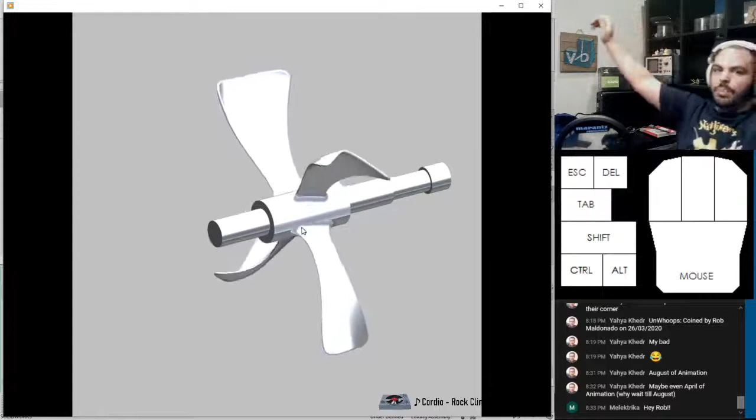October of Oscillation - we're getting more specific. You come up with great ideas, especially for not only the YouTube stuff but the Discord. So I'm really glad to have you around.